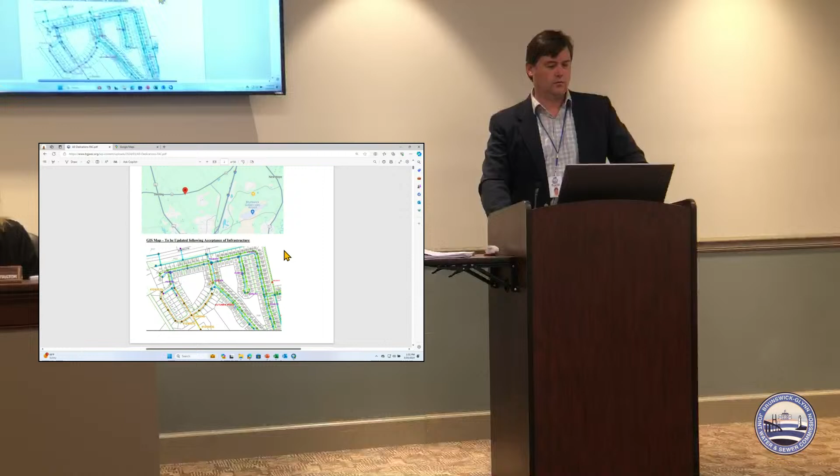Next one is Plantation at Golden Isles. As I mentioned before, this is a quit claim for an existing easement. Back in the early 2000s, Glynn County had not quite settled on the road alignment for Golden Isles Parkway Extension north of 99. They had acquired some easements for future water installation. The water mains were actually installed in a different location as that plantation development built out. And so those easements are no longer needed by the Joint Water and Sewer Commission.

There are 5 lots here that this quit claim applies to. This was initiated by an applicant through Glynn County for a pool permit. Once we found out that we had a water and sewer easement in their backyard, it prohibited them from installing a pool there. So we took it upon ourselves to pursue abandonment, so to speak, of this easement. It's no longer needed, and that is what this is. We're doing all 5 at one time here. Go ahead and clear it up.

Third item, Superior Storage, I mentioned before. This will come back to the commissioners, but since it's on the agenda, I'll talk about it. We're always on the lookout for existing infrastructure where it makes sense for us to approach the owner to acquire it. In this case, this is New Jesup Highway, or 341, in between there and Old Jesup Road. The way we came about looking at this is we had a potential customer, hopefully future customer, come to us up off Old Jesup Road asking for water.

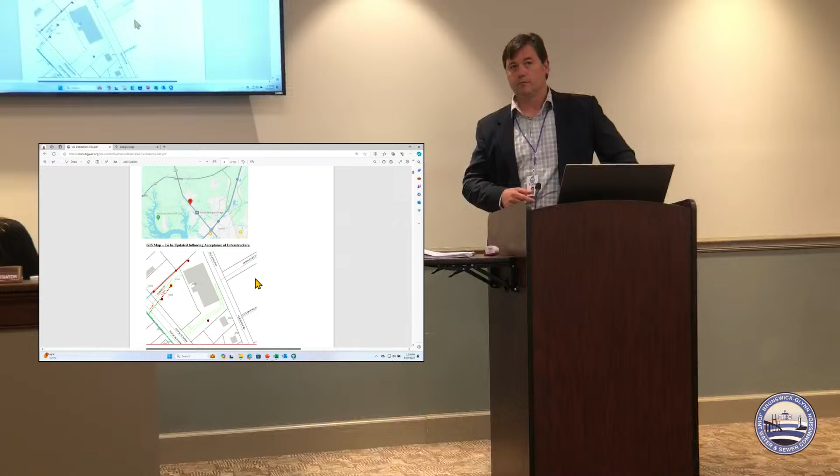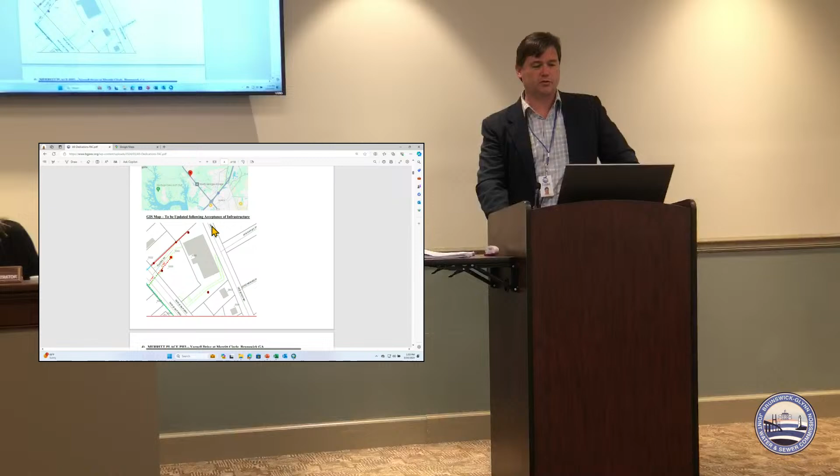Unfortunately, Superior Storage folks didn't get us the legal documents back in time for this commission meeting. But anyway, give you a little preview of that. Hopefully we'll see that for next month. But that'll give us a connection to Old Jesup in this area that we currently don't have, if that goes through. Hopefully it does.

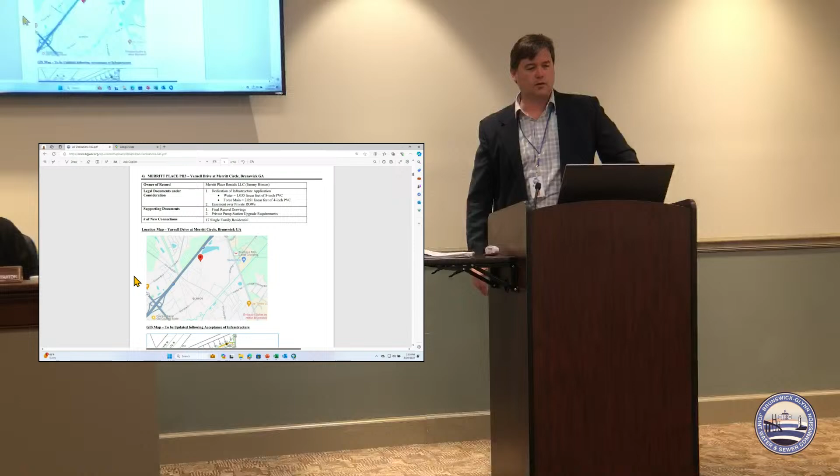Merritt Place Phase 3, as I mentioned, this was discussed last month at the Facilities Committee meeting there. There's some questions on the dedication of the private pump station and other private infrastructure in there. So this is a little over 1,000 linear feet of 8-inch PVC water main and a little over 2,000 linear feet of 4-inch PVC force main down Yarnell Drive to Old Jesup, which will open up a large area of potential customers.

Most immediately is a mobile home park just south of this development, Merritt Place, who has inquired about connection to sewer, wastewater. This development will bring us 17 new single-family residential customer accounts. And that is the fourth item there. And again, I'm happy to zoom into GIS.

On Merritt Place, we approached them about potentially upgrading the pump station per the commission's request. Gave them a detailed list of what would be required. There are standards which allow for the construction of private pump stations in the joint water and sewer construction standards. They meet all of those standards. We asked them about updating it to the public dedication standards, and they have submitted a letter from their agent that said they remain steadfast in their commitment to keep it private.

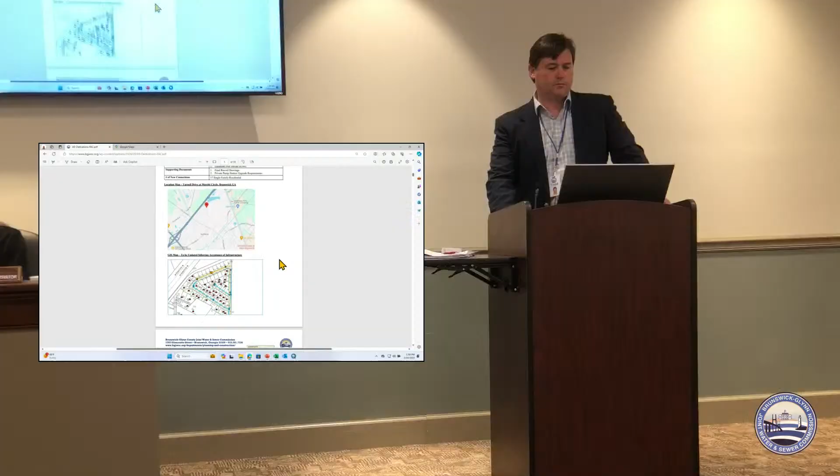You have no further comments or questions, all in favor? Well, when we bring it to the full commission, we're gonna designate a whole lot better on this drawing where the actual demarcation is. Commissioner Ford, if we look at the record drawing itself, let me pull this up and get down there to it. There's an annotation, albeit very small, that says end of public line. We'll highlight it on there for you tomorrow, though.

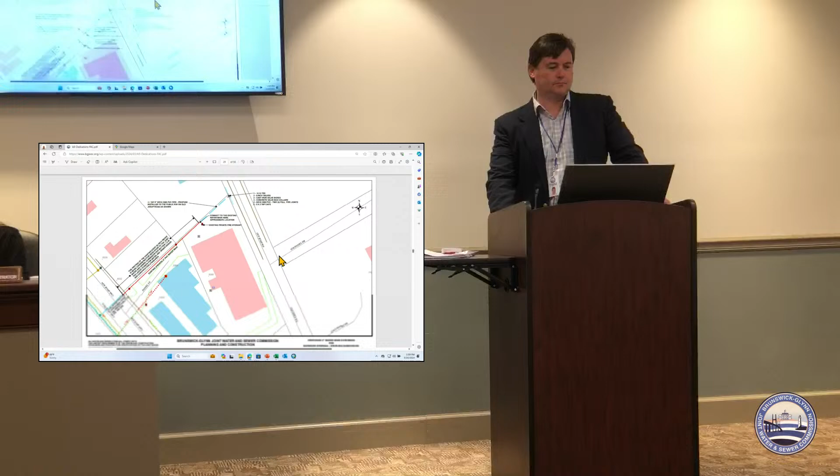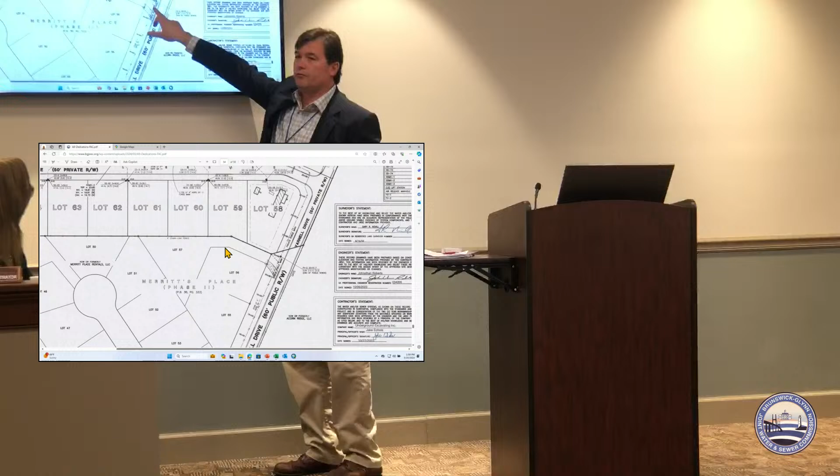Yes, sir. One second. Oh, so we're not even ending it back here? Where's the end? Down here, yeah, into public sewer. So here, I know it's very small. I had to zoom in, even I can't see that. It's end of public service. Got you. I thought it was actually up there by the turn. So when we put a valve there, that's the line of demarcation. Does that address it? Yep. Okay, thank you.

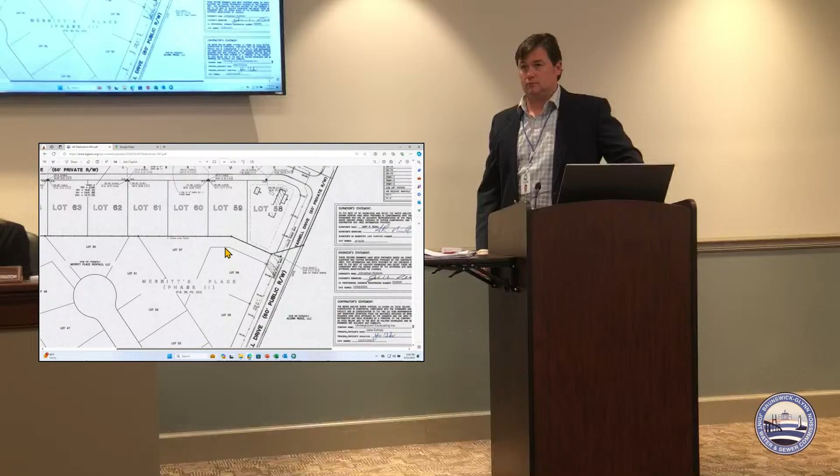All in favor, raise your right hand. Motion carries 3-0. Thank you, Commissioners. We'll move to discussion section, water production report, Mr. Burrows. Yes, sir. Our water production report for the month of February. Of course, February with 29 days, the total produced is lower, but the average daily was in line with where we have been the last few months.

On the mainland here, a couple of things to note. All of the connections on the North Mainland Water Loop projects are now open as of the first of this week, but three of the four connections were open by the end of February, so this does reflect some of the new flow patterns. You'll notice Goodyear Park had very limited flow for the month, and Brunswick Villa had a much higher flow than normal. That is because we were having well motor issues at Goodyear Park, so that well was shut off and Brunswick Villa was taking up the load.

But the advantageous part of the new loops, it has impacted the way we preferred. You see that I-95 is running significantly less than what it was, and FLETC has picked up as we anticipated. So we are seeing the impacts of that system being better looped and allowing water to move more freely through the system. Total flow for the month on the mainland, 4.942 million gallons. So very happy with the way that North Mainland project has worked out. The improvements seem to be bearing out as expected, which is always exciting to see, particularly after that Glencoe loop did the exact opposite of what we thought it was going to do. You can see our graph on the second page, very consistent water flow year to year.

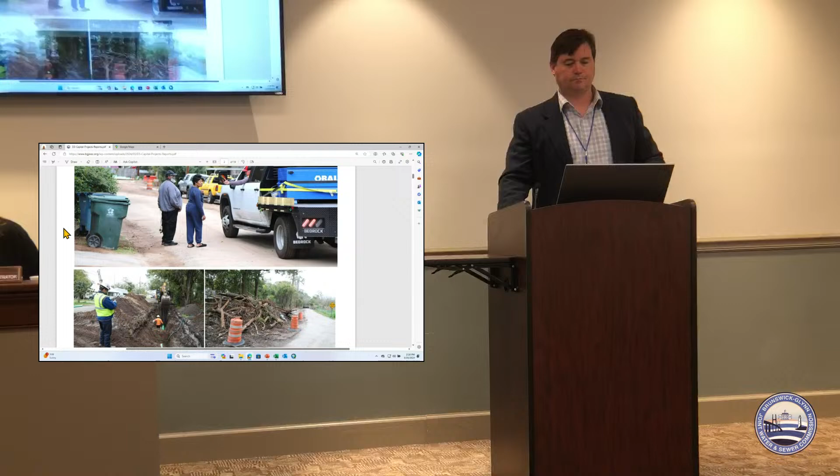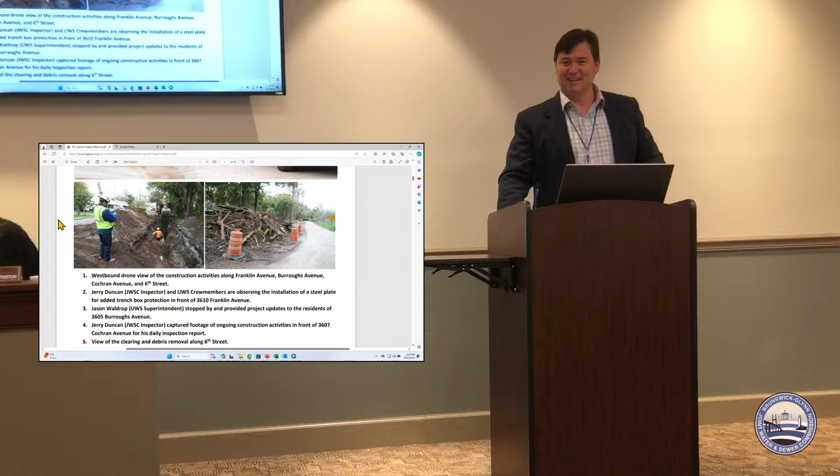Working hard to solicit for new connections, the whole point of the project out there. My understanding is there's probably about half a dozen folks connected, working on getting them into billing. So a very strong need out there, a lot of failing septic tanks. Next project, galvanized replacements. That's in-house water distribution. Staff member Bob Ward getting the spotlight this time on our distribution crew. Good shot of Mr. Bob there with typical items coming out of the ground. Couple of good shots in the bottom right pictures, the bone bin out at water distribution. See a lot of the materials coming out of the ground.

Those are the service lines, not the house service lines, is it? No, that'd be our side. A lot of interesting configurations of valves and fittings and whatnot. And we're replacing that 1-inch line with what size line? That would be a service from our main to the meter, so we would replace that 1-inch service with a 1-inch poly line. Even on 5/8 by 3/4 meters, we put a 1-inch service and bush it down to a 3/4-inch connection. That way, if the customer ever decides they want a 1-inch meter, we don't have to replace the service.

But don't let that get out. Secret.

All right, next project, Canal Road Water Production Facility. There's a good shot of the newly denuded property around our well site. I'll give them credit, they got that down in a hurry. Yes, they did. Very efficient logging crew. And the lot to the north of us is the one we spoke about earlier, the agenda item about the lease agreement with the airport authority. They were kind enough to remove the trees, so we don't have to do that as part of our project. Good shot in the middle there, an on-site coordination meeting with Georgia Power for the power service upgrade to the site. A couple of our team members.

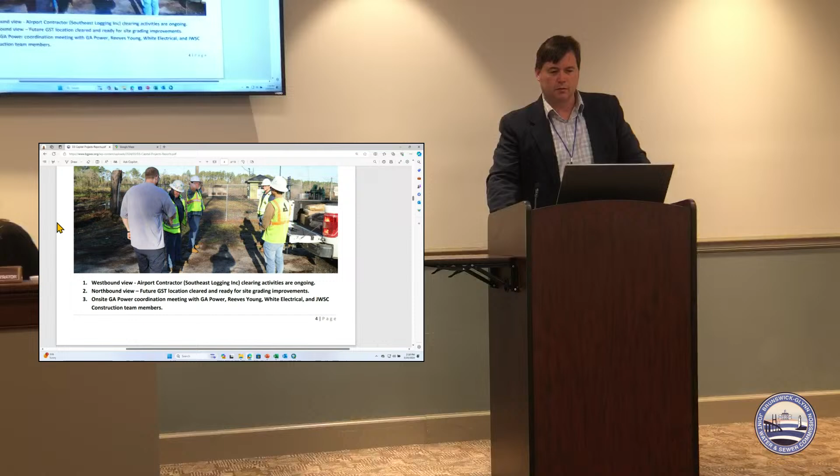Next project, North Mainland Water Loops, we spoke about earlier. Mr. Burris pointed out the benefits already being realized with those connections. The project is wrapping up here quickly, just waiting on Glynn County to approve the final paving that happened on Old Jesup. So all the paving's complete, we're just waiting on Glynn County's final sign-off, and then we'll be able to wrap that project up.

The project's going very well. Contractor Valancourt Construction. Last couple pictures dressing up the shoulder, doing a good job there. I think they passed all their bacteria testing, I believe. Yes, I don't think they popped any of them. I was not told of any that failed. Yeah, so that's a testament to their cleanliness and whatnot while they're working. Didn't have any rogue possums climbing up in the pipes or anything like that.

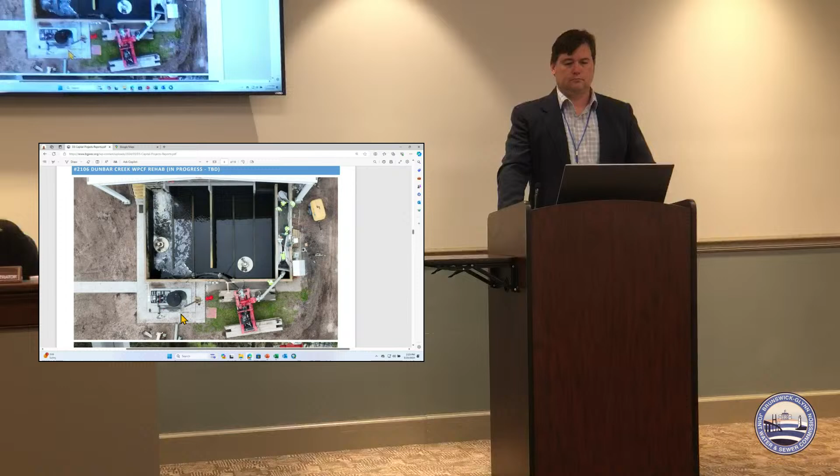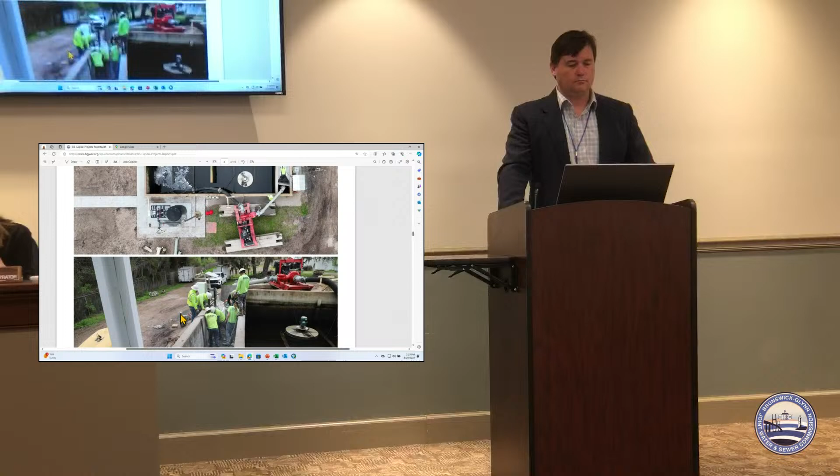And then on the second page here, the big excavation that is going on right now, that is the hole for the new clarifier. There's also a tremendous pile of dirt just to the left of your photo that you can't see now, that has come out of that hole. That is a full-grown excavator in that hole, in case you're wondering. It looks small from here.

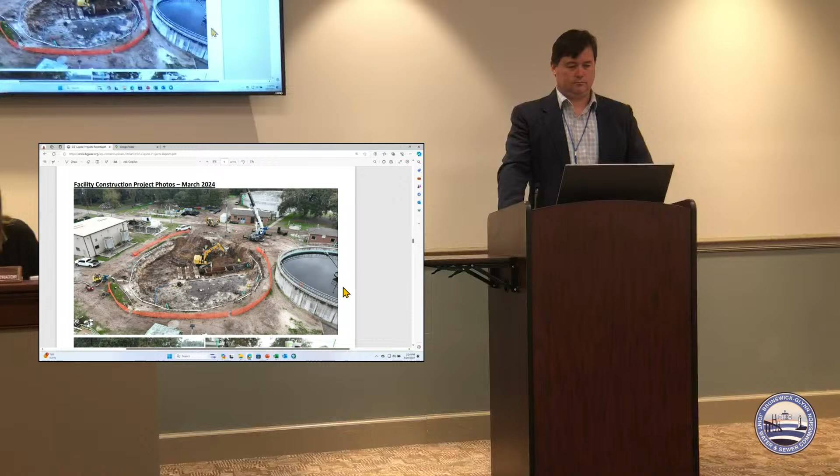But they will begin pouring the new floor for the clarifier next week. So they got the piles in. Piles are all in. Piping is supposed to be finished up this week. The drains and everything are supposed to be finished up this week, and they're gonna start pouring concrete next week. And then we got some various fittings and pipes going on, and a picture of the new flume before it was installed when they delivered it there. Cross-section there kind of shows you what we're talking about.

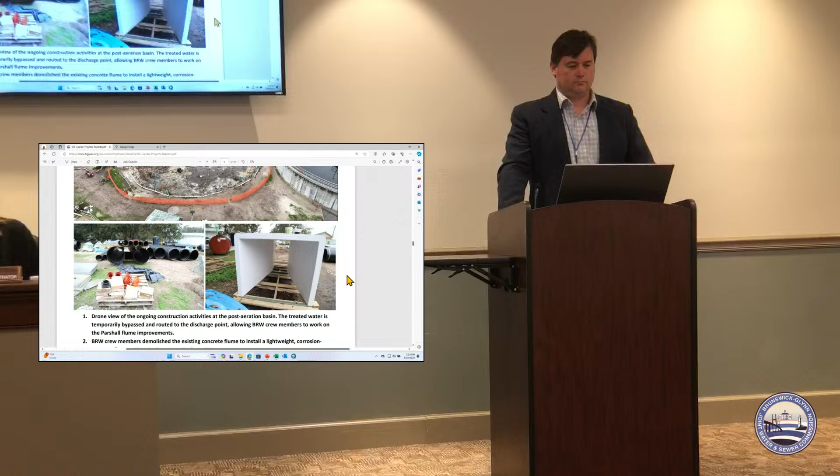Project going on very well, looking at final completion sometime July of this year with the new clarifier and roadway improvements. So essentially, the work that's still remaining is to do the new roadway improvements, get the new clarifier online, and we did find out in our updated waste load allocation for the new permit, we will have a phosphorus limit, so our engineer and contractor are working on solutions for that. Likely will involve chemical addition of alum to remove that phosphorus at the facility.

But we may be able to reutilize the old filter bays because it's already contained and put the phosphorus equipment in there in a secondary containment area. So looking at reusing some of that material.

I got to compliment the Parshall flume vendor's name, Open Channel Flow. It's a pretty appropriate name. It's clever. Always good to tell people what you do. Yeah, in all caps too.

All right, next project is 4001. So we already spoke about this. I'll zoom through this guy. It's on the south end of the city, and that's part of the three pump station project. And there's our third pump station, 3101. Again, part of that trio of pump station upgrades. That's on the South Mainland. I have to coordinate construction activities there with school drop-off and pickup activities. Yep.

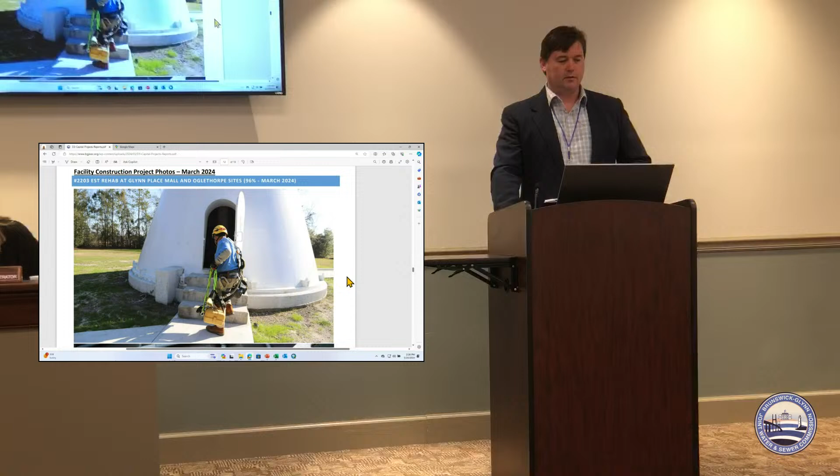So, Glynn Place Mall and Oglethorpe elevated storage tanks. We're trying to wrap that project up and complete it. We're right there at the end, trying to finish up some punch list items. There's Chapman Technical Services about to climb the tank there at the mall and give us a good inspection. There's a typical altitude valve there. They're still working on trying to get the gremlins out of it.

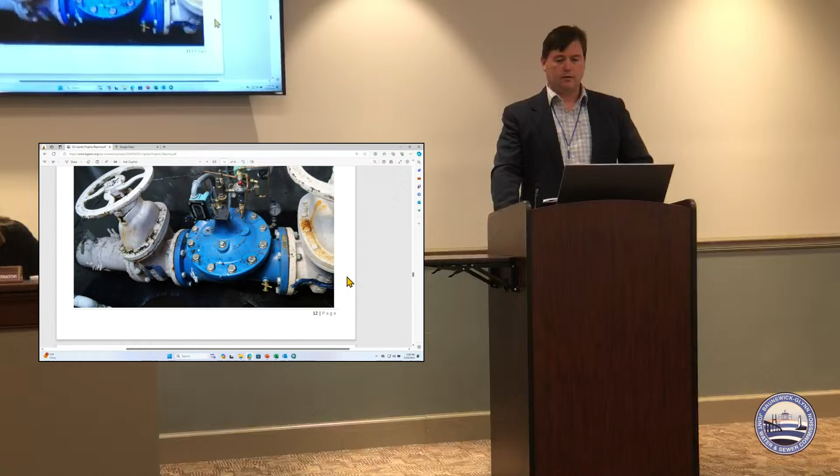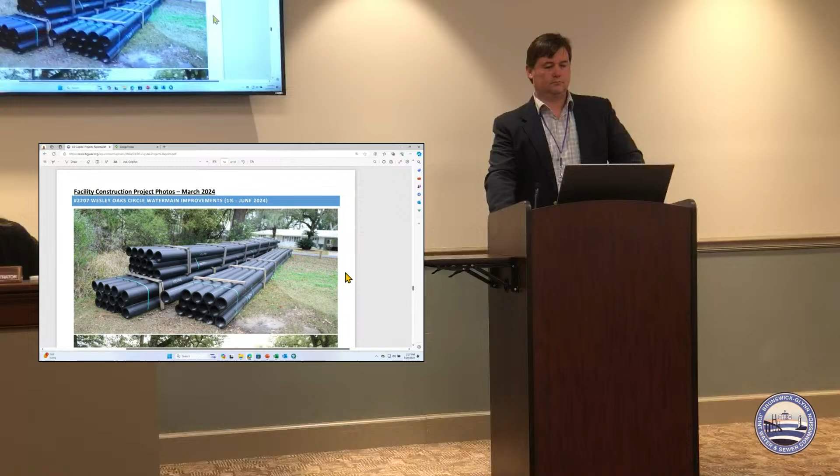Last project on the list here is Wesley Oaks Circle Water Main Improvements, another in-house project. Good section of poly main in there, stacks of it. The main stem through Wesley Oaks Circle is a 6-inch, and there's 2-inch loops. And we're gonna do an 8-inch across the middle with 4-inch loops around. Increase flows and pressures in that area. The directional contractor is mobilized. Once they get the pipes installed and tested, then we'll connect all the services in-house.

All right, very good. The typical sheets are included with the detail. If there's any questions, glad to talk about those as well. I did want to, do we want to look at pictures from the big, Clifford, the big red balloon? Yes. So exit 29 water production facility.

Let's see, all right, Janice, you had it somewhere. I'm sorry, what? It pulled up twice. Just pick the box. Okay, there we go. Let's do the video first, and hopefully our video, maybe.